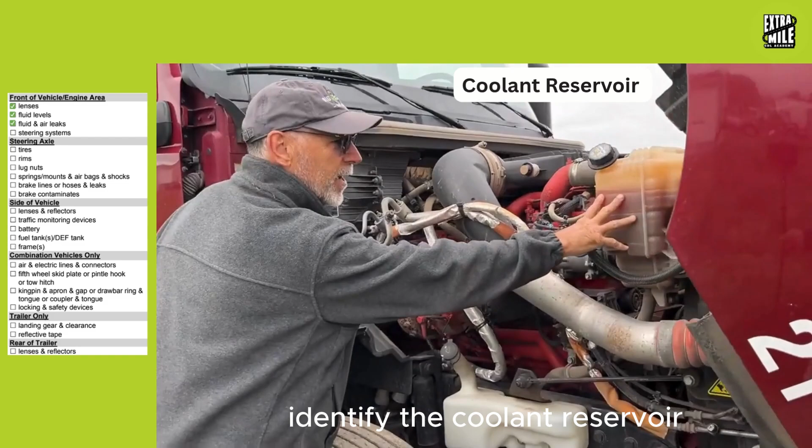Identify the coolant reservoir, make sure that it's properly mounted and secured, and that it's not leaking. I'm going to check all the connecting hoses and couplings to the reservoir to make sure they're not leaking. I'll identify the minimum and maximum, making sure the level is between min and max. If I have to add fluid, I'll add it here. This cap is secure and tight, and I only loosen it and add fluid when it's cool to the touch.

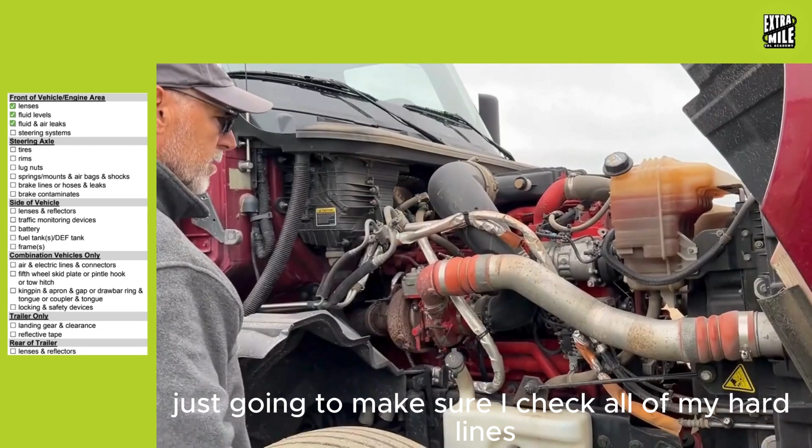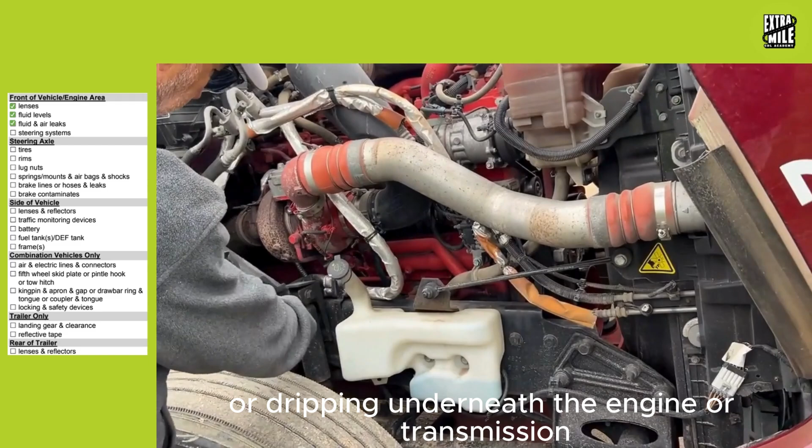I'm going to do a general overview on this side. Just going to check all of my hard lines and soft lines, make sure all my connections are good, all the casings are good. Make sure electrical has no exposed or frayed wires. I'm going to check underneath and make sure there's no puddles or dripping underneath the engine or transmission, and just generally nothing's loose, broken, or damaged on this side of the vehicle.

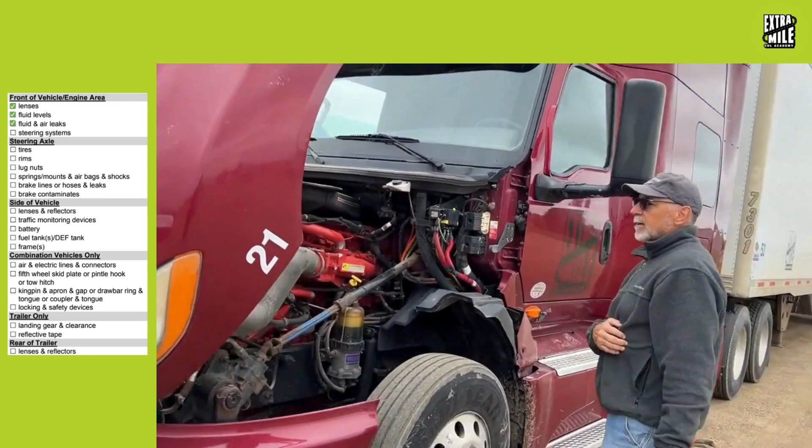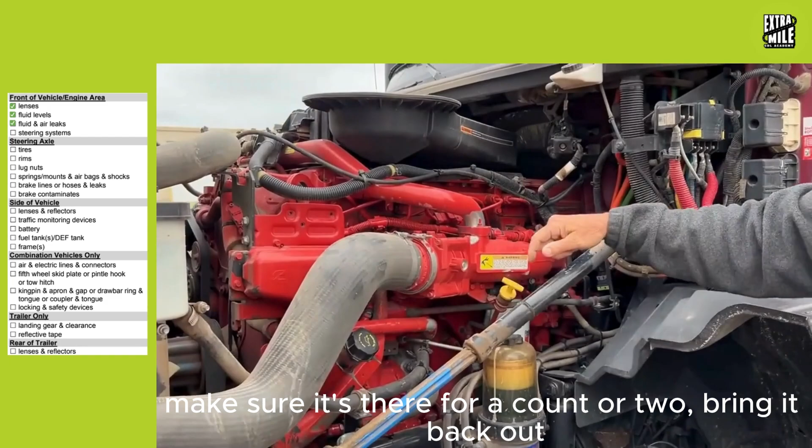We have a couple of critical fluids to identify on this side. The first is the engine oil. The engine oil dipstick is securely mounted, not missing any hardware, and locked in place. To check the engine oil, I would take the dipstick out, wipe it clean, put it back in, make sure it's there for a count or two, bring it back out, make sure it reads between add and full, then replace it and lock it.

If I had to add engine oil, I'd do it over here at the filler cap. The filler cap is on tight, the neck is secure, not loose, and it's not leaking.

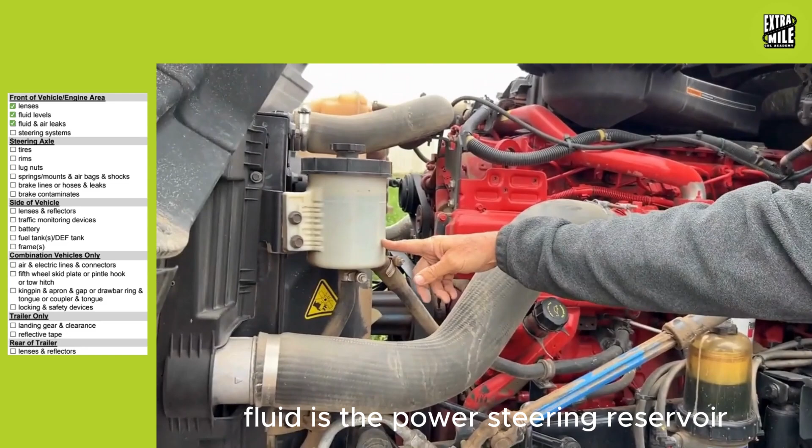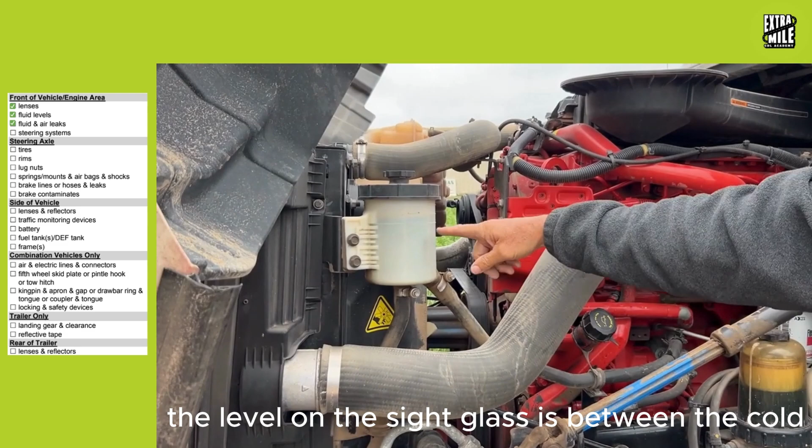The second critical fluid is the power steering reservoir. The power steering reservoir is properly secured, hardware is in place, there's no cracks or leaks. The clamps to the hoses here are secured, not damaged, not leaking. Check to make sure the level on the sight glass is between cold and hot, or max hot, somewhere in there, and we're right at max cold. If I had to add fluid, I'd add it up here at this cap, which is on tight and secure.

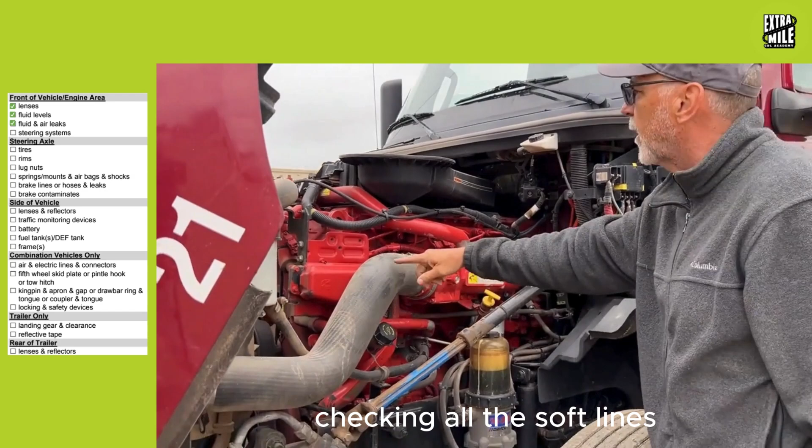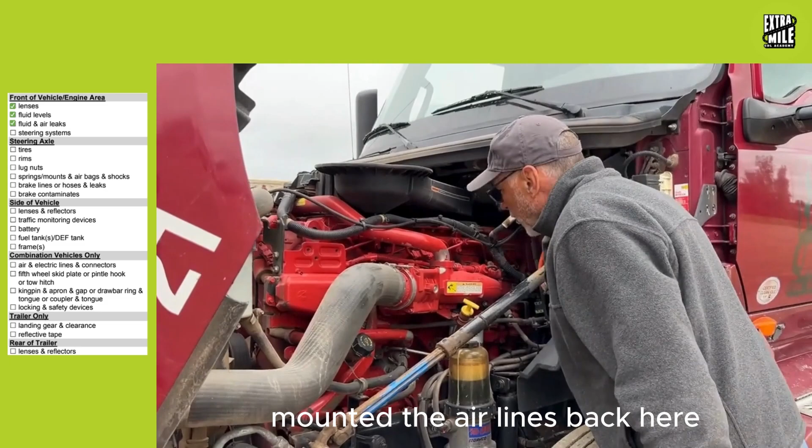I do another general overview on this side of the engine, again checking all the soft lines, checking the hard lines, checking the connectors, checking the electrical, making sure everything is secure and mounted. The air lines back here have no audible leaks, I don't see any visible leaks, I don't see any broken parts, and I don't see any drips underneath the engine and transmission on this side as well.

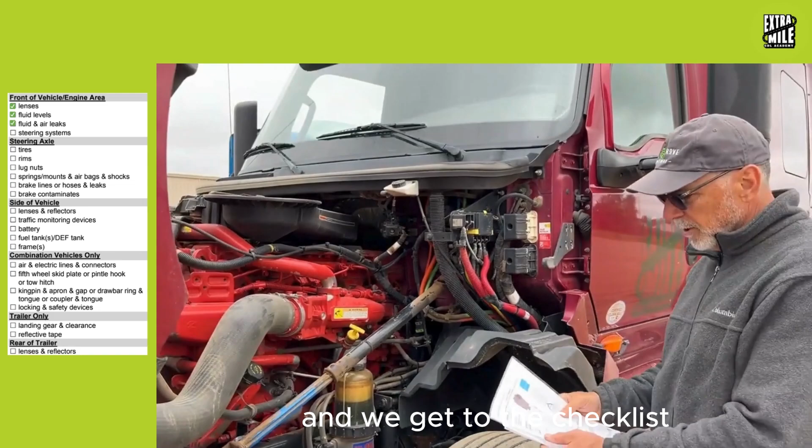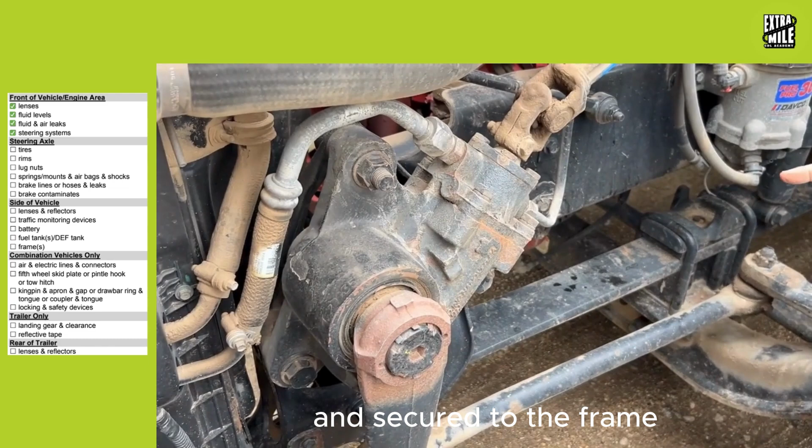Okay, when we get to the checklist, the next thing to do is the steering system. So we're down to the steering system now. In the steering system, identify the power steering gearbox, that it's properly mounted and secured to the frame, there's no missing hardware, and it's not cracked or leaking.

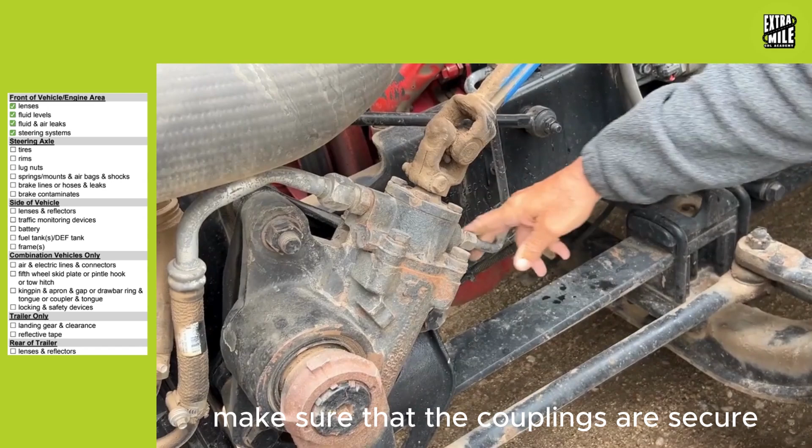I'm going to check the hard lines or soft lines, whatever you have in your truck, to the gearbox, making sure the couplings are secure, the lines are secure, and they're not leaking. I'm going to check the steering linkage from the gearbox to the wheel to make sure they're all properly secured, not damaged or broken.

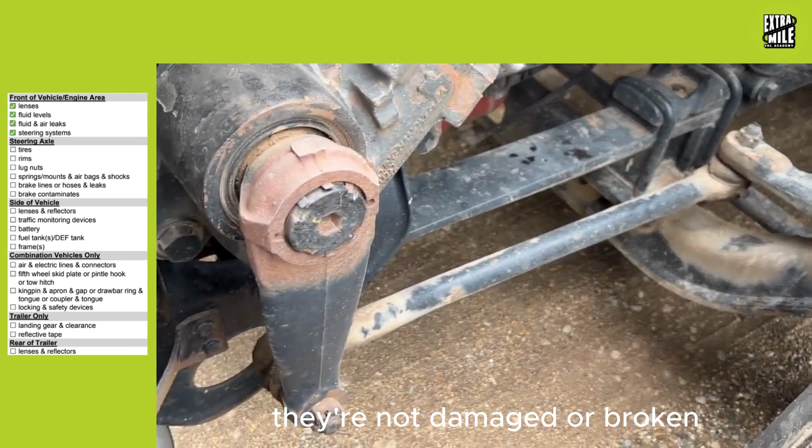All the way down here from the pivot arm to the tie rod, I'm going to check the ball joints. Identify that we have 3 ball joints.

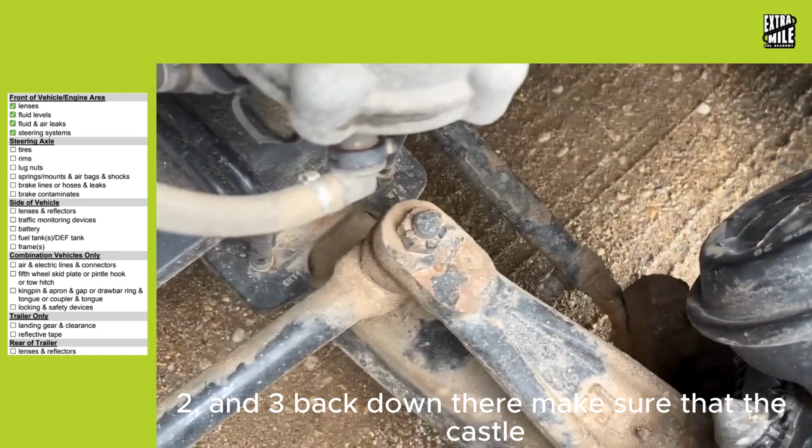And all the connecting parts down here, the ball joints are not loose, not worn, not leaking. I'm going to check to make sure we have our castle nuts and cotter pins. We have 3 of those too, 1, 2, and 3 back down there. Make sure the castle nuts and cotter pins are in place and not missing.

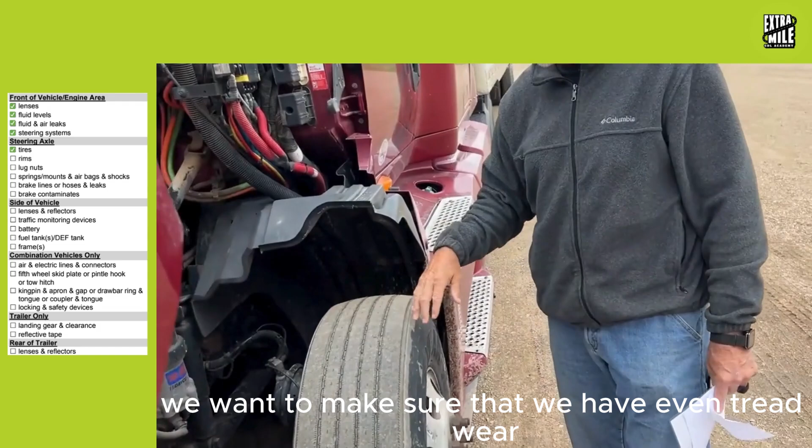Okay, we're going to move outside to look at our tire. On our tire, we want to make sure that we have even tread wear. To measure the tread depth, I'd use a tread depth gauge on each of the major grooves to make sure we have a minimum of 4/32 of an inch.

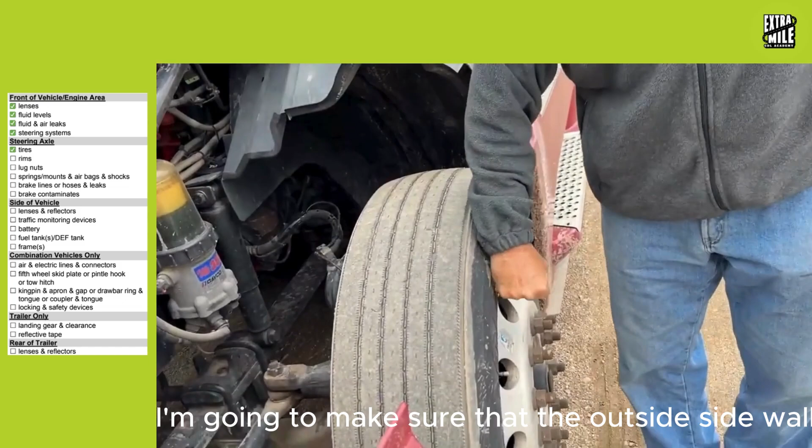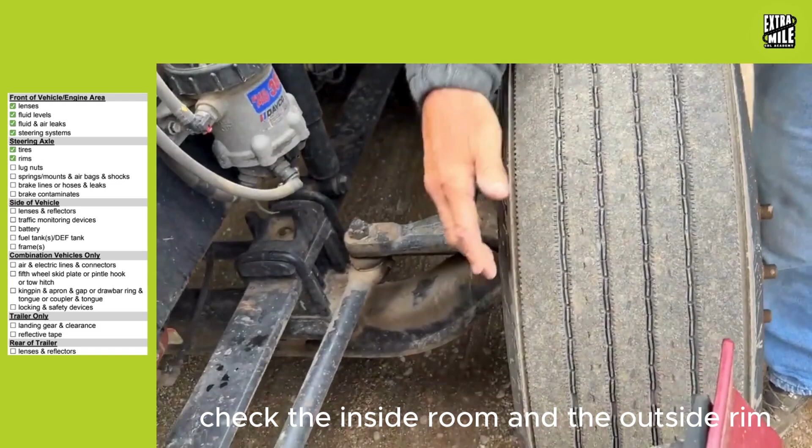I'm going to make sure that the outside sidewall and inside sidewall and the tread is not cut, damaged, or exposes any plies or cords. I'm going to check the inside rim and the outside rim to make sure they're not cracked, not bent or broken. There's no broken welds on the inside of the outside rim.

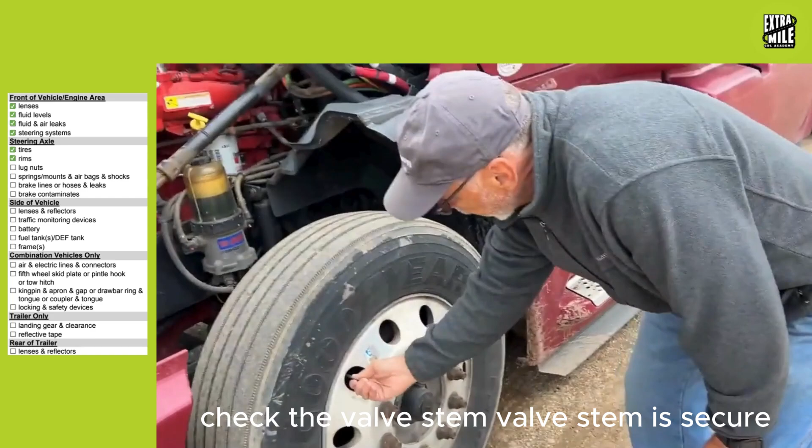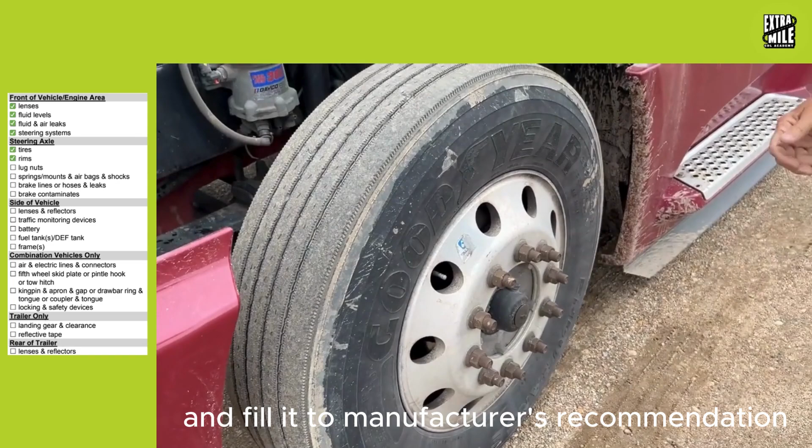Okay, check the valve stem. The valve stem is secure, it's accessible, it's not leaking, and it has a metal cap. I would make sure to use an air pressure gauge to check the pressure of the tire and fill it to manufacturer's recommendation or your company's recommendation.

Check the lug nuts. All the lug nuts are present. They're not damaged. I don't see any rust trails, shiny threads, or elongated bolt holes that would indicate looseness.

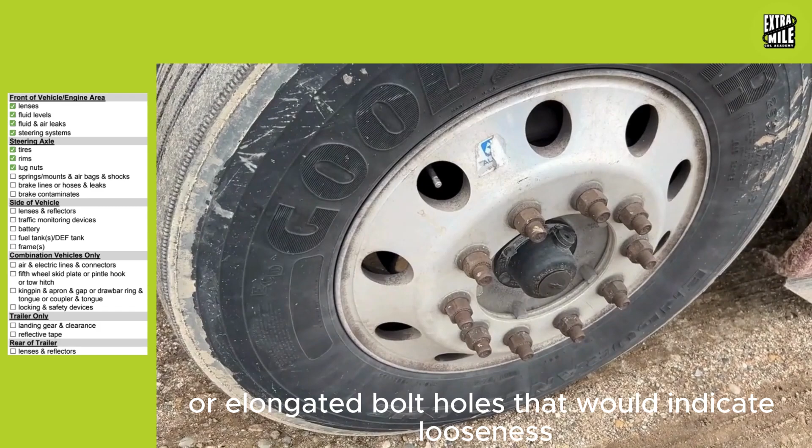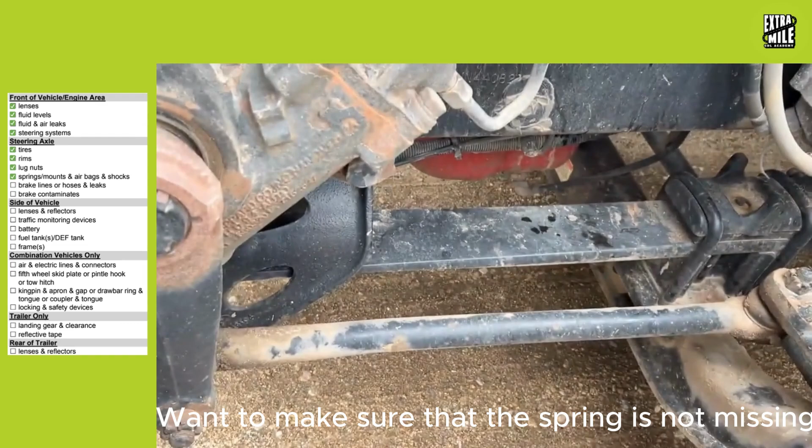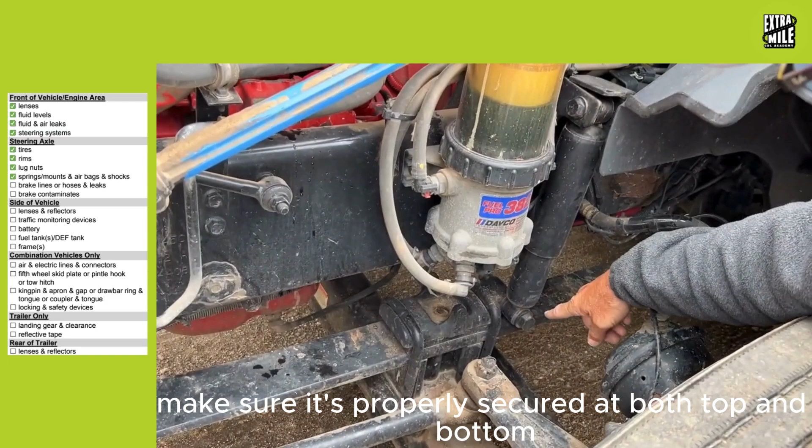Come in here to the inside of the truck and look at the suspension. Identify the brackets in the front and the rear. Make sure that the brackets are properly secured to the frame, that there's no missing hardware. I want to make sure that the spring is not missing, that it's not shifted or twisted, that it's secure to the axle. And look at the shock absorber, make sure that it's properly secured at both top and bottom, it's not cracked or damaged, and it's not leaking from the middle.

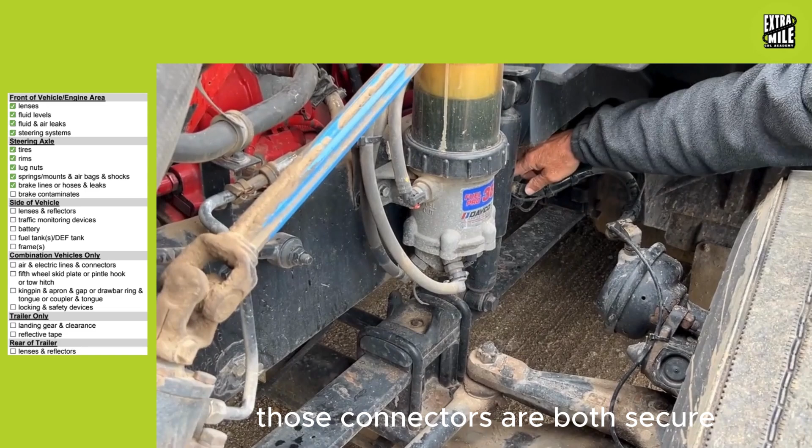And look at the air lines and the air connectors. The connector here and the brake chamber here on the frame, those connectors are both secure, they're not damaged, they're not leaking. I'm checking the air line itself - there's no abrasions, bulges, or cuts. There's no audible leaks, and the air line supplies air to the brake chamber.

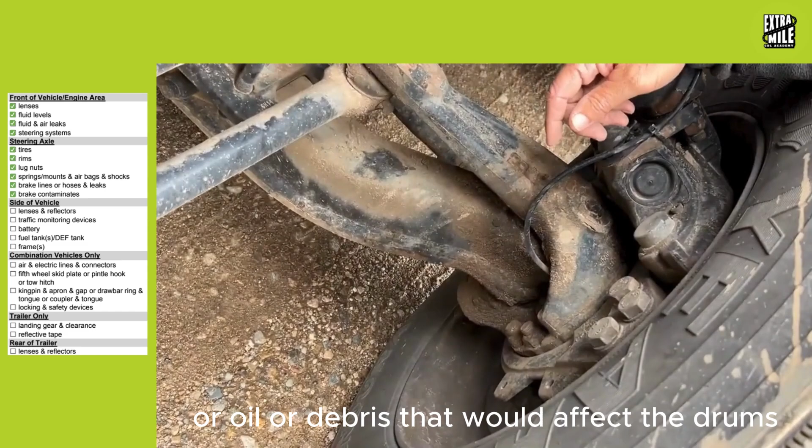I'm going to look inside the tire here. I'm going to look inside and make sure there's no contaminants such as grease or oil or debris that would affect the drums, the rotors, the shoes, or the lining. And I look inside, I don't see any brake contaminants.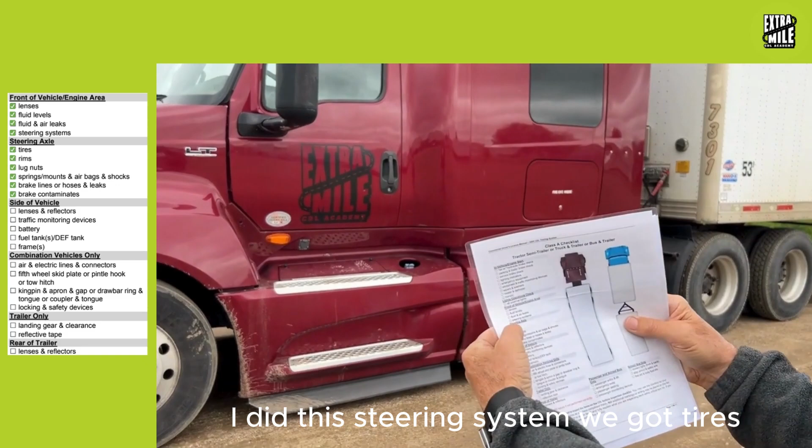All right, that concludes the front axle part of the test. We're going to close the truck, close the hood. So as I go through this, again, I did the steering system, we got tires, we got the rims checked off, the lug nuts, the spring mounts, the brake lines, and the brake contaminants. So we've got check marks on all those.

Going to the side of the vehicle. On the side of the vehicle, I'm going to check for all reflectors and lenses on the side of the truck, on the front and the side of the trailer. Make sure that all the lenses and reflectors are secure, they're not bent or broken, cracked, missing, but they're the proper color and they're clean.

Next thing I'm going to do - the manual calls them traffic monitoring devices, we're just going to call them mirrors. The mirror brackets, both on the door and the fender, should be secure, not damaged, not broken. I'm going to look at the lenses inside the frame, make sure the lenses are secure, not damaged, make sure they're clean. Nothing worse than a shaky and a loose lens in your mirror.

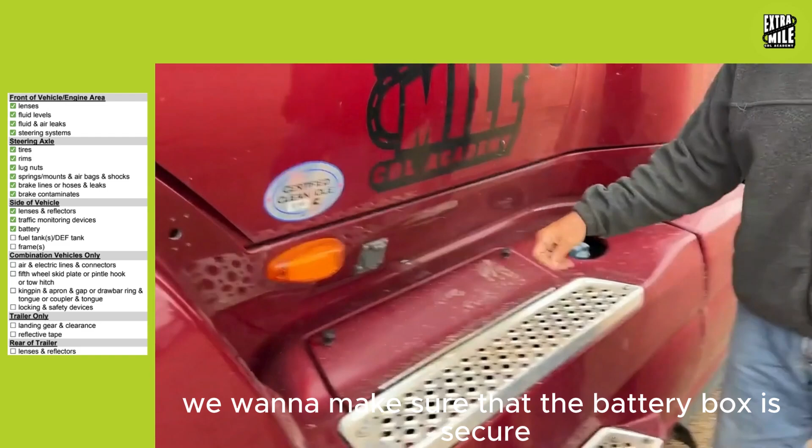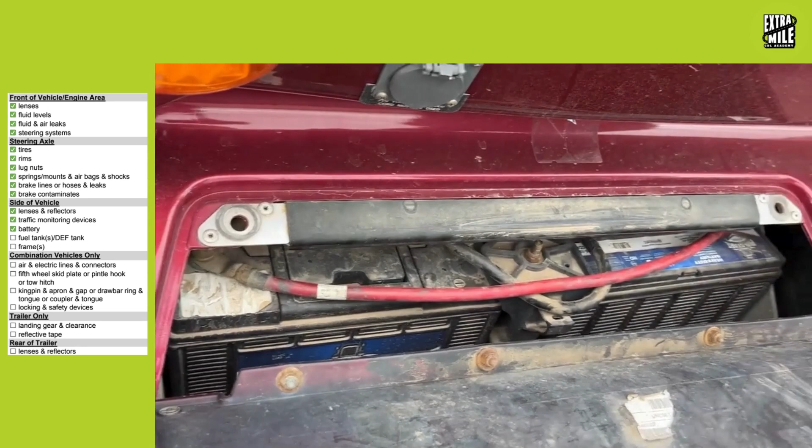I'm going to look at the cables, make sure they're not cut, frayed, or damaged. I'm going to look at the terminals or posts to make sure everything's secure and tight, with no excessive corrosion.

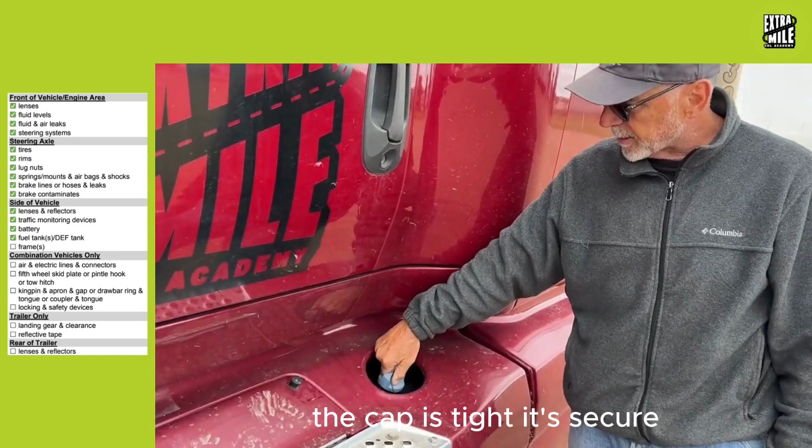I'm going to skip over to the DEF fuel tank. The cap is tight and secure. There's no leaking from the lines above, and no evidence of leaking below the DEF tank.

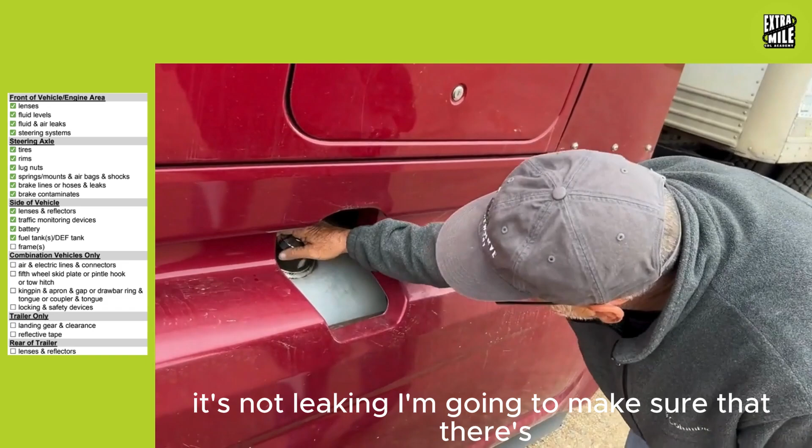We look at the diesel fuel tank. The cap here is secure and tight, it's not leaking. I'm going to make sure there's no leaking against the fuel lines on top, and no evidence of leaking underneath.

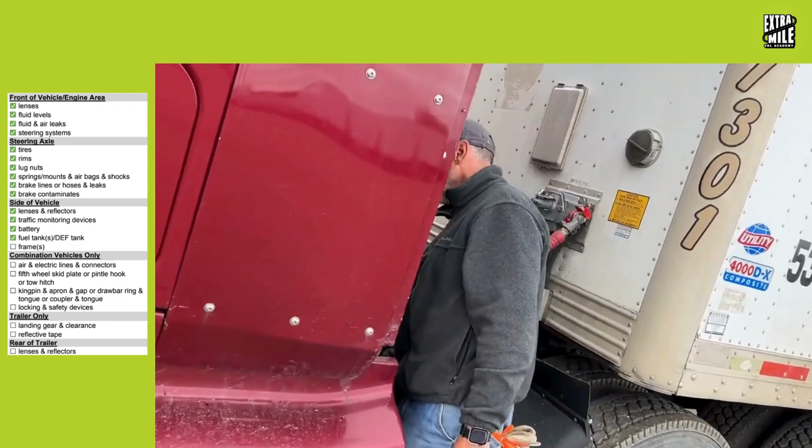On this truck, I like to come around to the back. I can step inside here and see the straps on the fuel tank, making sure the straps are secure and the fuel tank is secure.

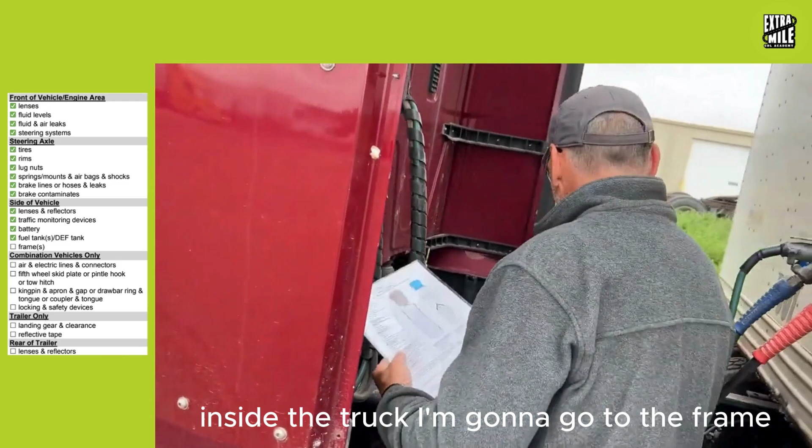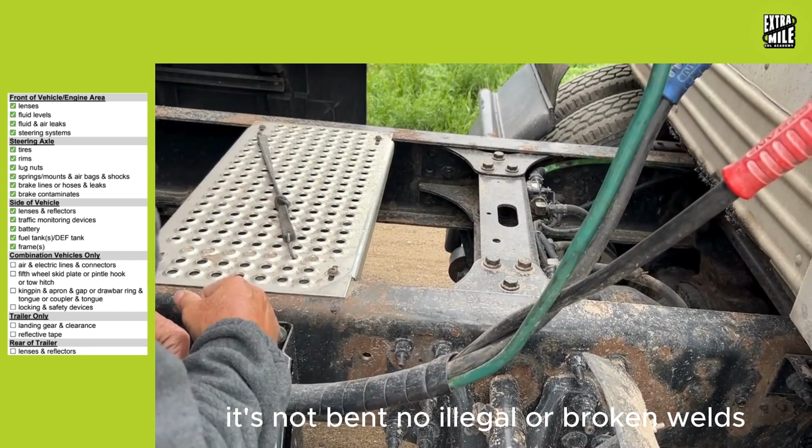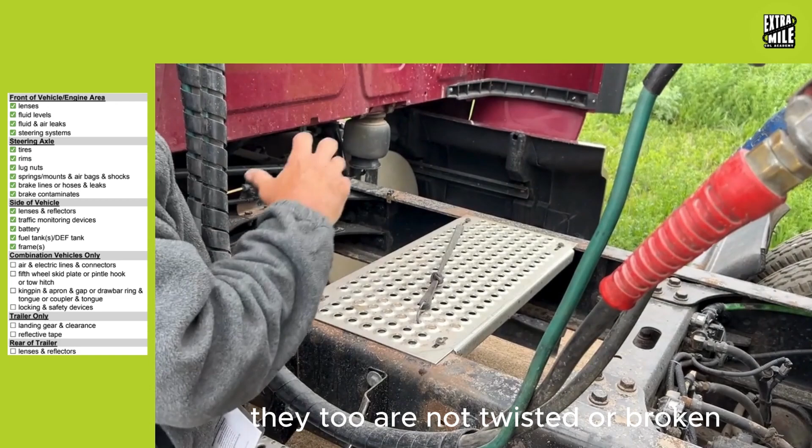Inside the truck, I'm going to check the frame and cross members to identify the frame as properly secure. It's not twisted, torqued, or bent, with no illegal or broken welds, no illegal holes. I'm going to look at the cross members, making sure they're all in place, not damaged, with all hardware in place, and not twisted or broken.

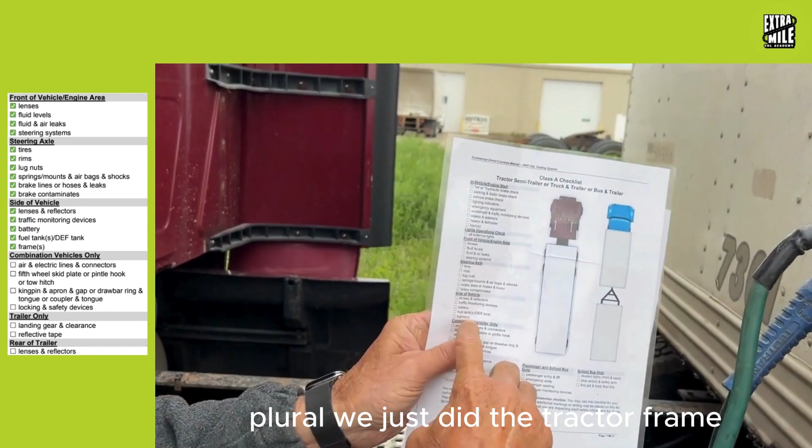We do have to do the trailer frame as well, but I do that a little later, when we get to landing gear and clearance and the tractor frame. Our sheet has an 'S' for frames, plural. We just did the tractor frame; we'll do the trailer frame later. So next we go to air and electric line connectors.

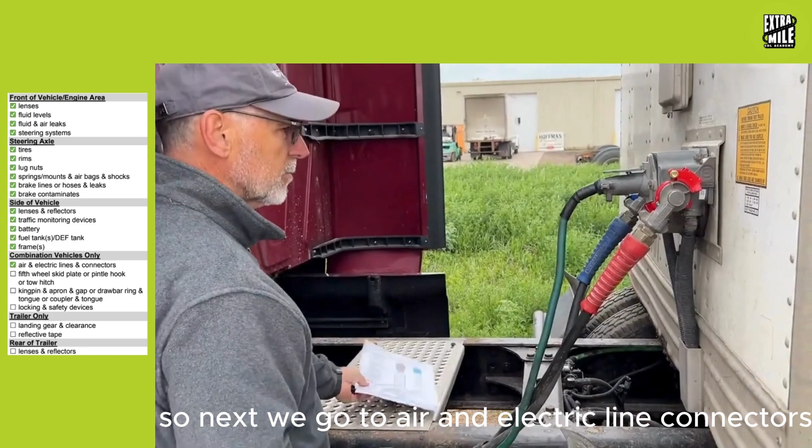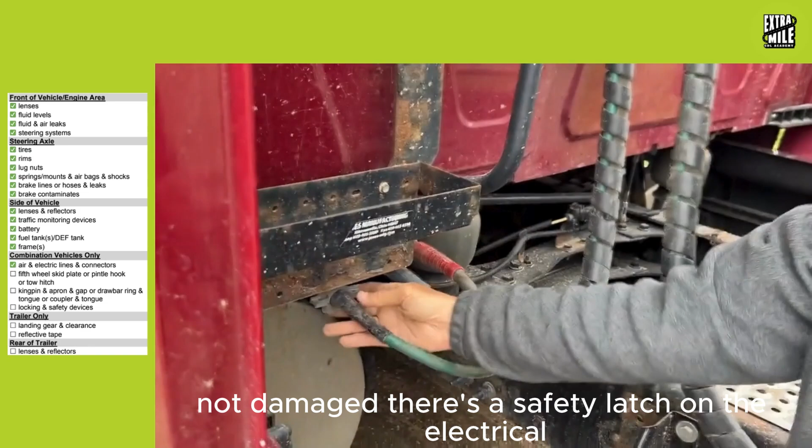Make sure we check both the trailer and tractor connectors. Look here, make sure our connectors on the tractor are secure, not damaged. There's a safety latch on the electrical, and we want to make sure there's no audible leaks.

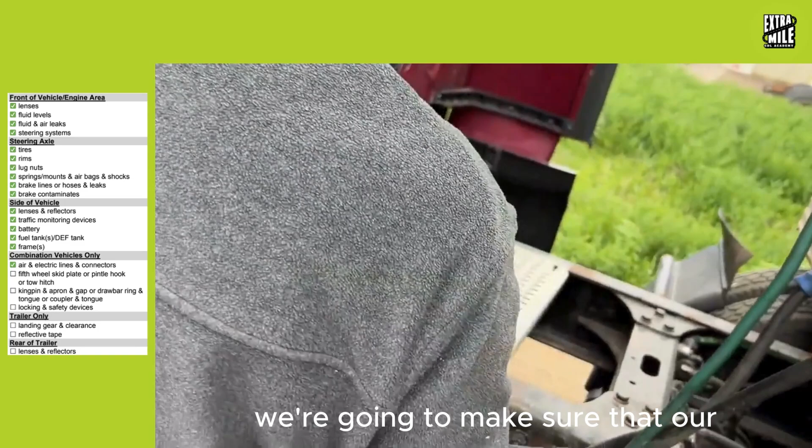We're going to follow the lines with our connections here all the way over the tractor, making sure the air lines and electrical lines aren't tangled, crimped, pinched, or dragging on anything. There's no exposed, frayed, or cut wires on the electrical.

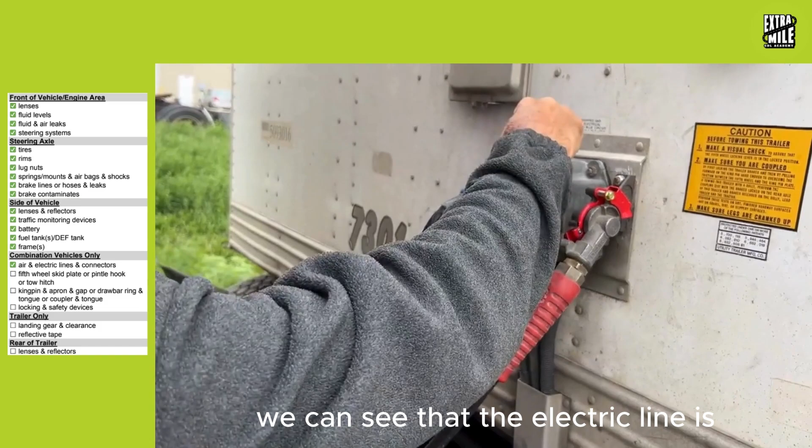We want to come back here to the tractor and trailer to make sure our glad hands are properly seated and sealed, with no audible leaks. We can see the electric line is set inside the socket or receiver, with a latch in place. Again, no damage, no audible leaks here.

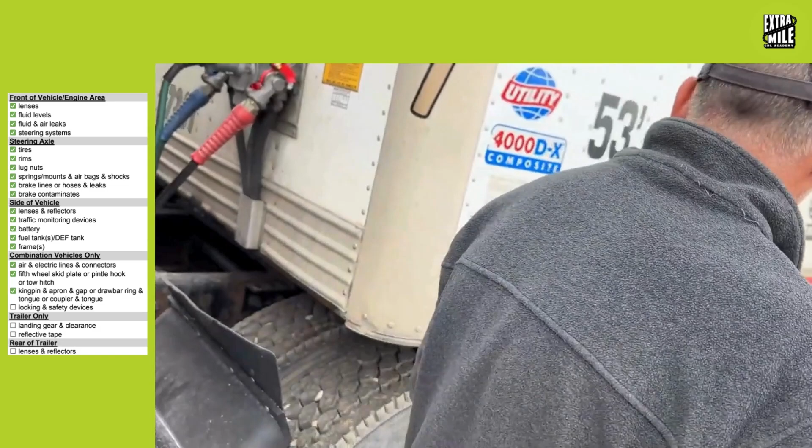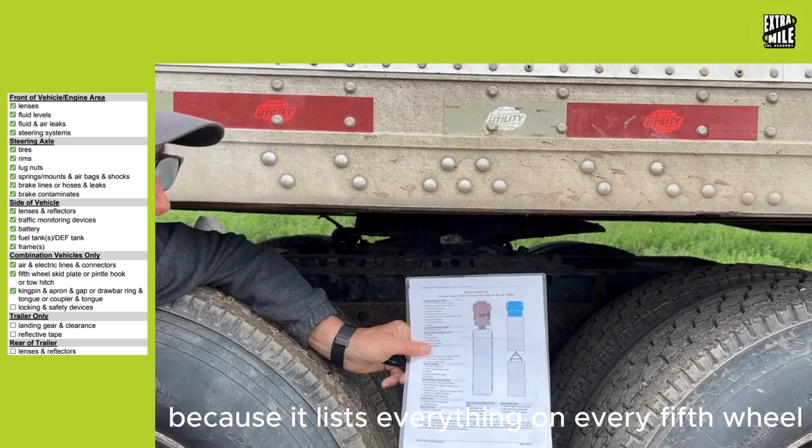Okay, I'm going to move to the fifth wheel. This is hard to understand because it lists everything on every fifth wheel combination that could be tested, so we just have to know part of this. We have to know the kingpin and apron and gap, the locking and safety devices, and then the skid plate.

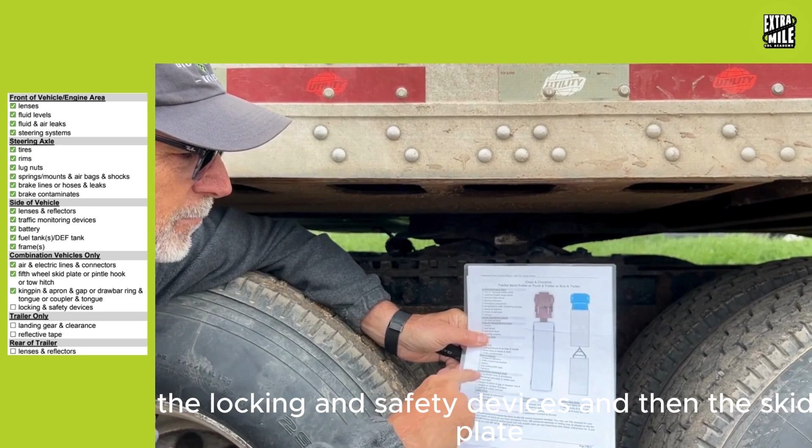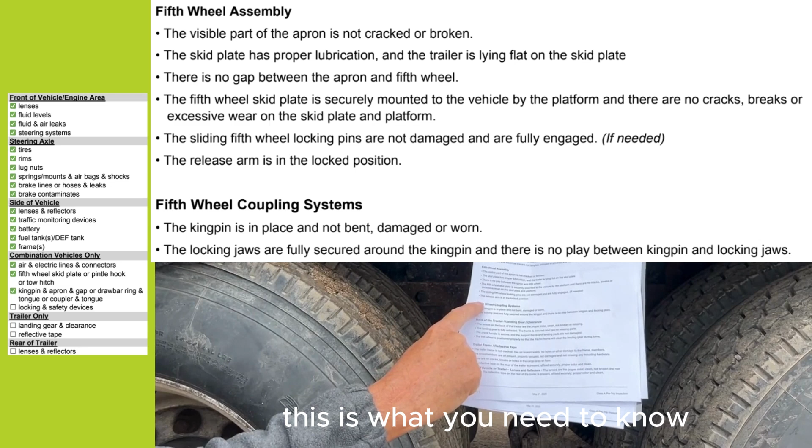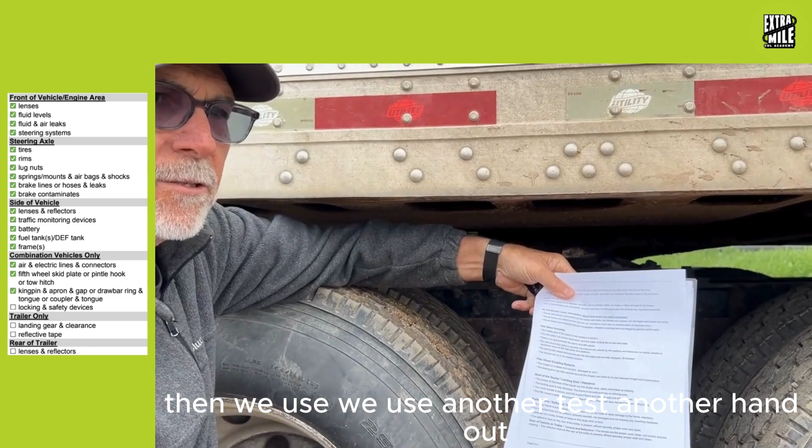What you're given in your handout, everybody's going to get one like this, and this is what you need to know, in this order. The fifth wheel assembly right here is what you need to know for the Class A test. If you have a Class A test with a gooseneck, pintle hook, or drawbar, we use another handout. But for Class A with no restrictions, you'll use this fifth wheel assembly, so make sure we memorize that.

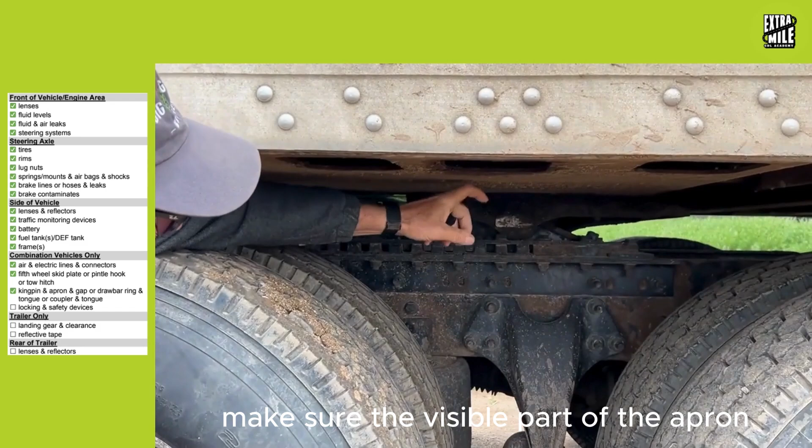What we want to do here is identify the apron, making sure the visible part of the apron that we can see is not damaged or broken. We want to make sure the apron is laying flat on the skid plate.

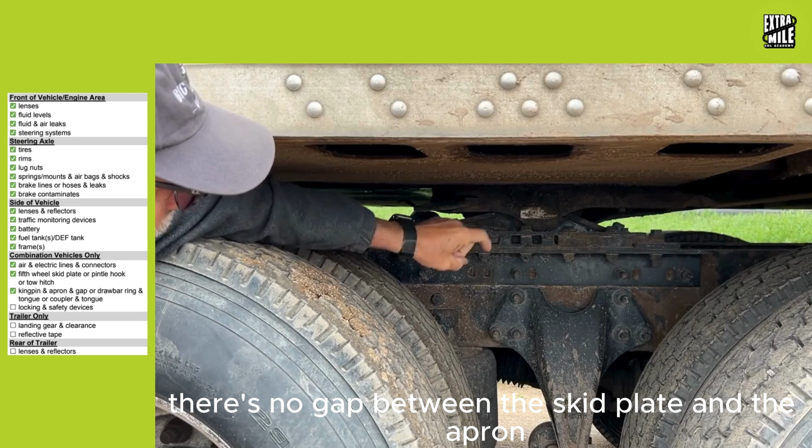There's no gap between the skid plate and the apron, and it is well lubricated. We want to look at the skid plate to see it's firmly attached to the frame by the platform. The platform and apron are not damaged, not worn, not broken, anything like that.

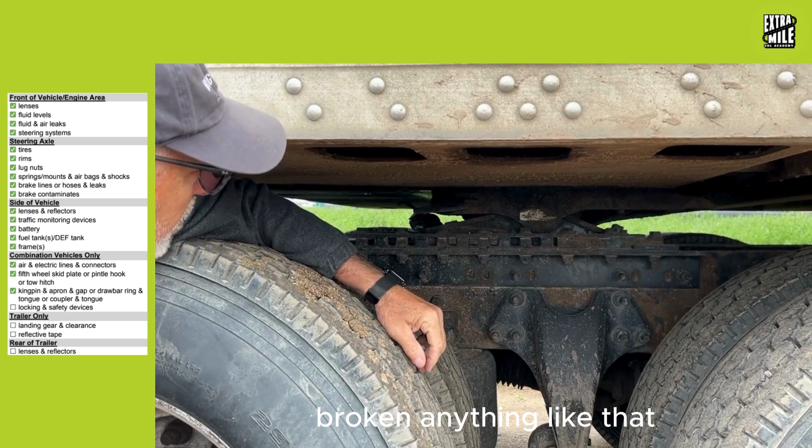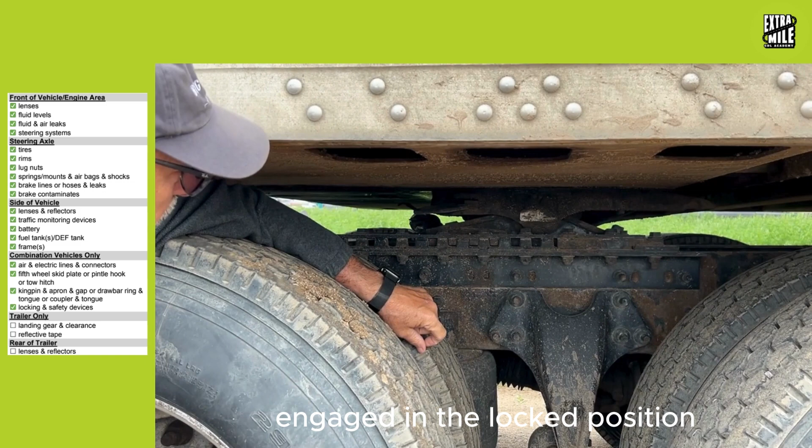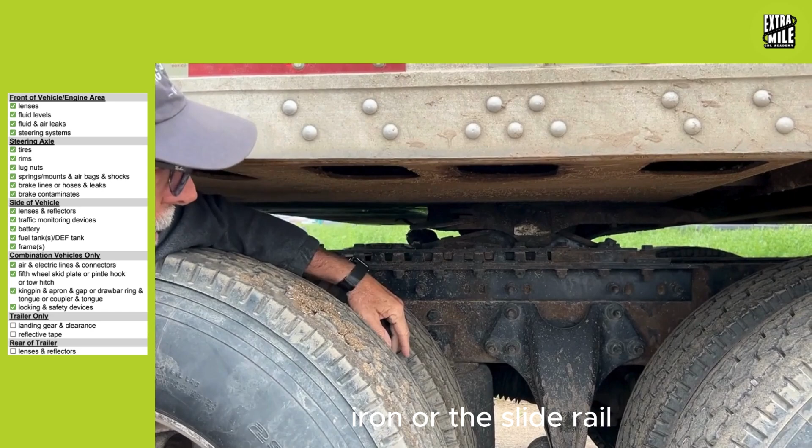The platform is properly secured to the slide rail by these three sliding pins. You can see those sliding pins are engaged and in the lock position. The release handle is in the fully locked position as well. Then I always check to make sure there's no missing hardware along the side of that angle iron or the slide rail. All the nuts and bolts, all the hardware is in place.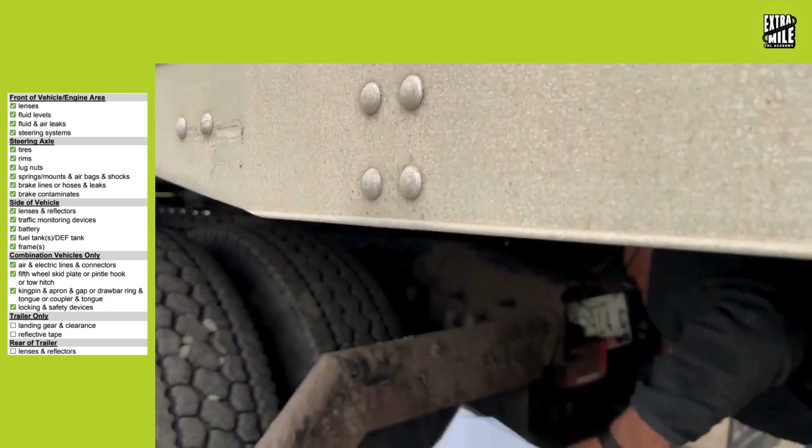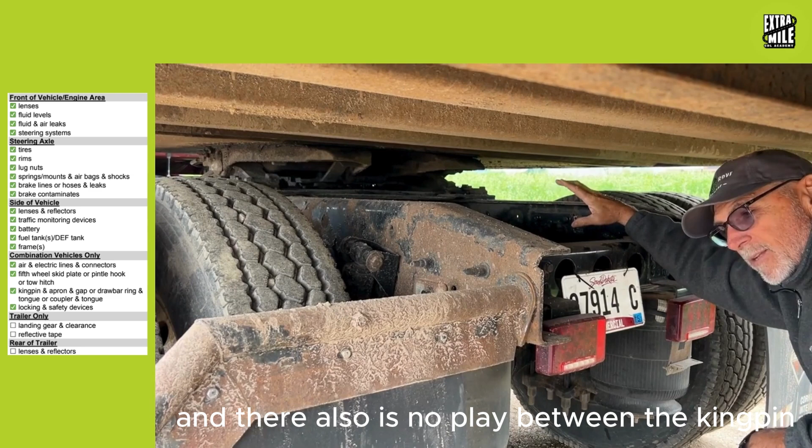Now we got to jump underneath. Underneath there, we're going to look up in between the skid plate, and we're going to see the kingpin. We want to make sure the kingpin is properly mounted, secured, and it's not cracked, broken, or especially bent. And we look at the locking jaws. You can see the locking jaws behind the shank of the kingpin, and they're in place in the lock position. There's also no play between the kingpin and the locking jaws.

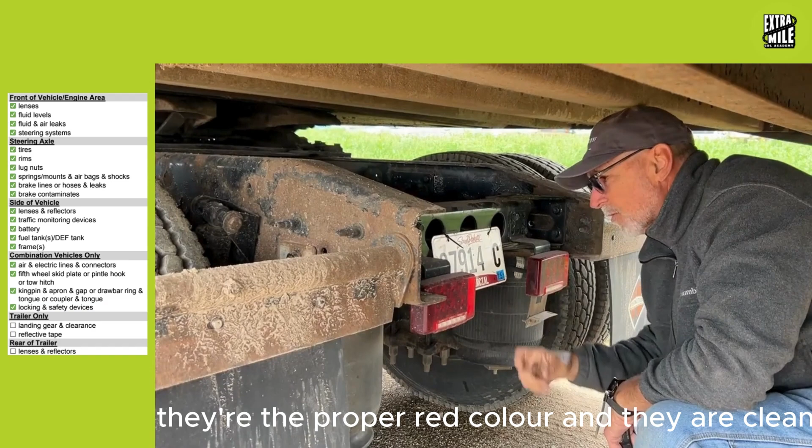We're going to identify the lenses on the back of the truck. They are properly secured. They're not damaged or broken or missing. They're the proper red color and they are clean.

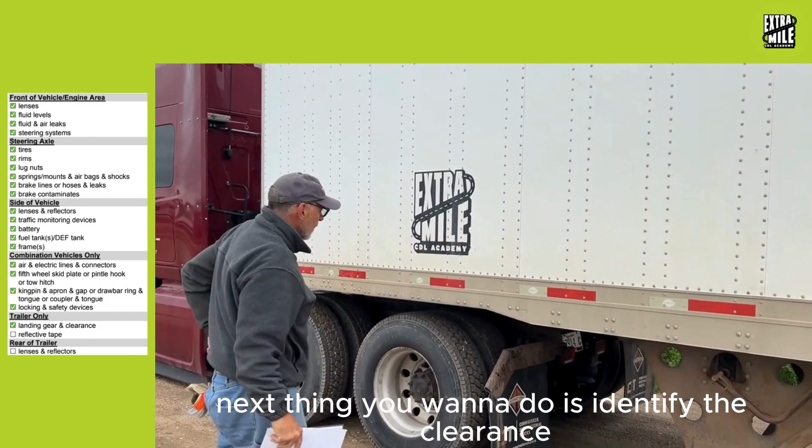Next thing we want to do is identify a clearance. The fifth wheel skid plate is positioned correctly so there's enough room between the frame of the tractor and the landing gear to make all your turns.

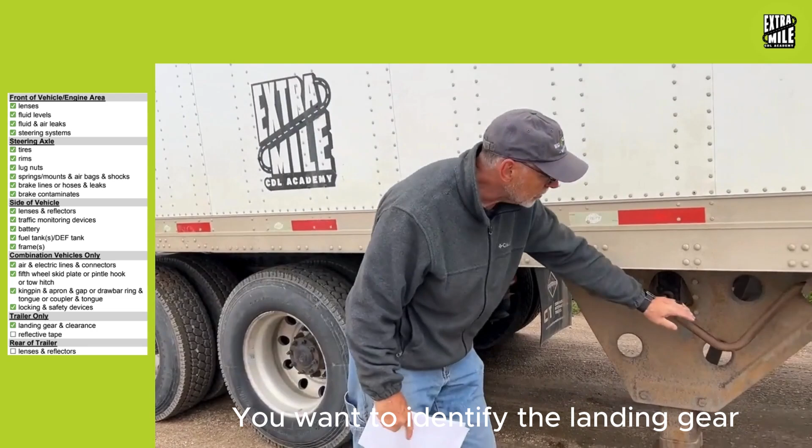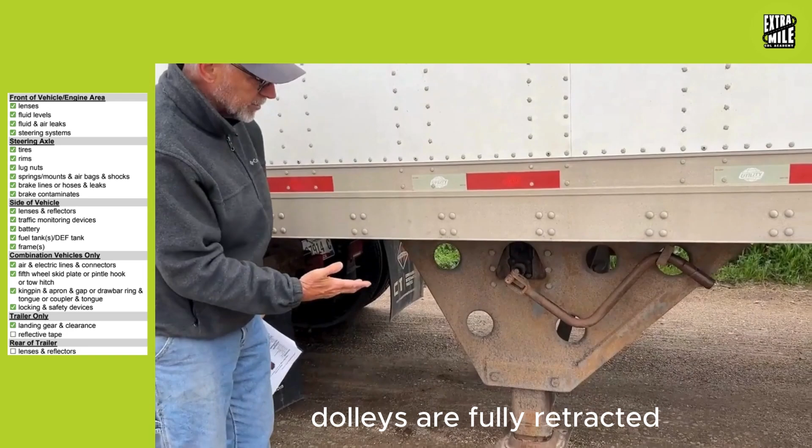You want to identify the landing gear. The release handle or the crank handle is in place in a stored position, don't let it hang free. Your frame is properly mounted and secured. All the hardware is in place. The dollies are fully retracted and the landing pad are not broken or damaged.

We also want to identify the support frame across the middle, that's the X bars back there. Support frame is properly secured to the frame. All the hardware is in place and is not damaged.

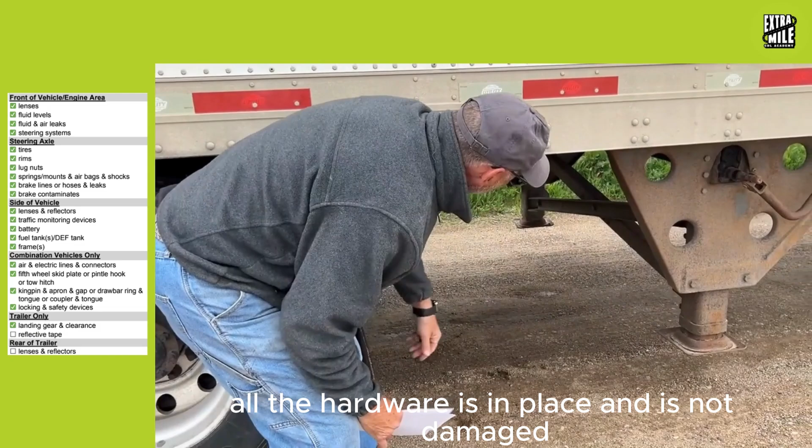At this point in time, we'll look at the frame of the trailer. Take a look at the trailer, make sure everything is properly secured and not damaged to the side of the trailer. All the rivets are in place here along the base of the trailer.

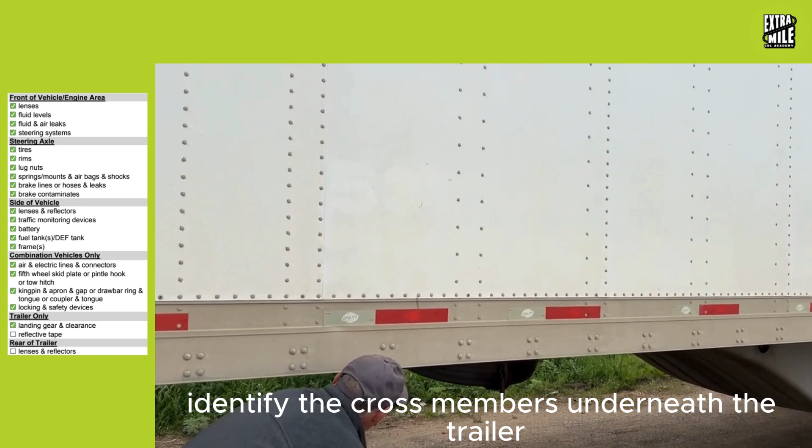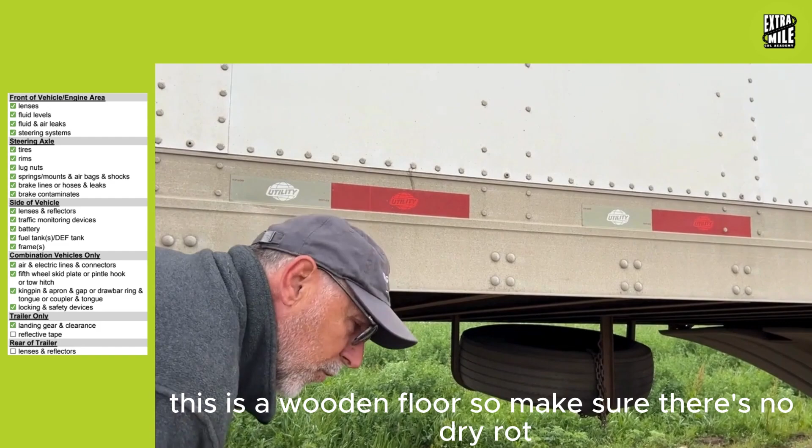You want to look underneath, and you identify the cross members underneath the trailer. They're all in place, they're properly secured, not damaged, not broken, not missing. Want to look at the floor or the deck of the cargo area. This is a wooden floor, so make sure there's no dry rot, and make sure there's no damage or holes on the floor.

You want to come out here and look again at the reflective tape on the side of the trailer, make sure it's all properly affixed, it's clean, and it's the proper color.

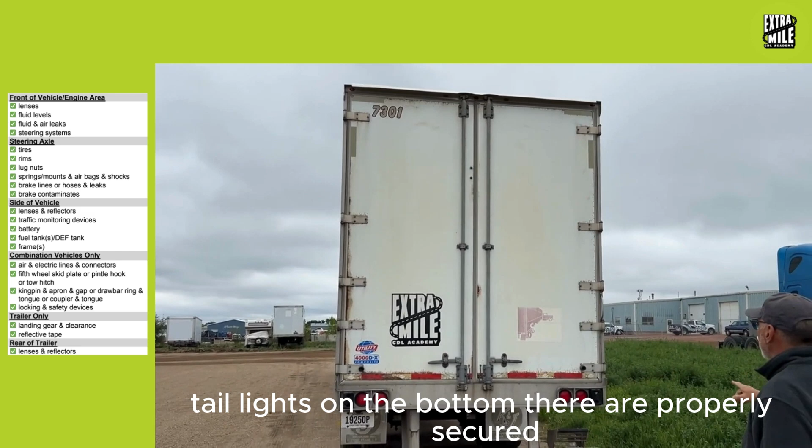Alright, so we're back here at the back of the trailer, just about done. The back of the trailer we're doing like in the front, we're just checking the lenses. Our clearance and marker lights on top, our tail lights on the bottom, they're all properly secured, they're not damaged or missing, they're all proper color and clean.

We have reflective tape across 100% across the back of the trailer, and that is all affixed securely, is all the proper color, and it is clean.

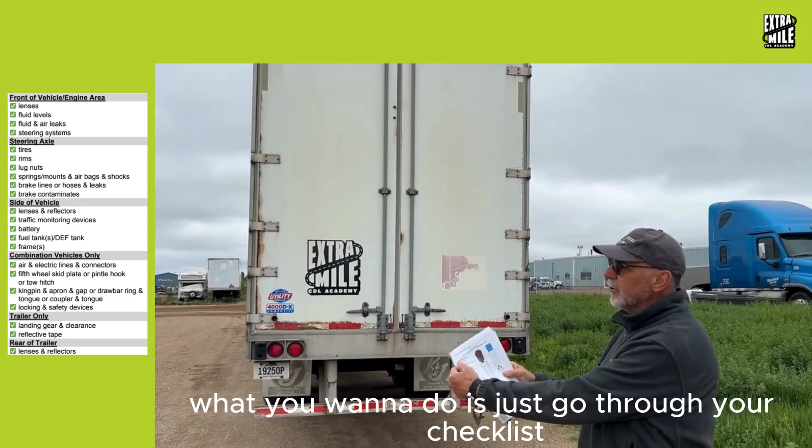At this point in time, what you want to do is just go through your checklist. You get to use this for a reason, it's going to help you immensely. Just go through it and make sure that you didn't miss anything.

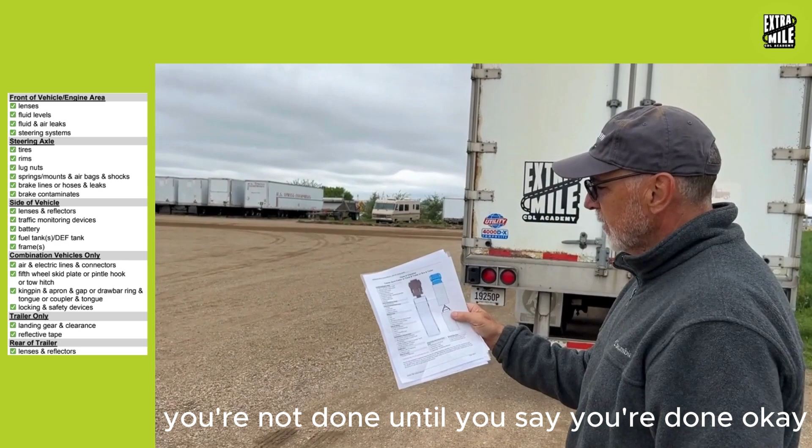Once you say you're done with the test, then you're done, and then he'll grade you. But as long as you're checking, you can go back and say, oh Mr. Tester, I forgot to do the rims on my axle, walk back up there and do it. You're not done until you say you're done. This completes my inspection.